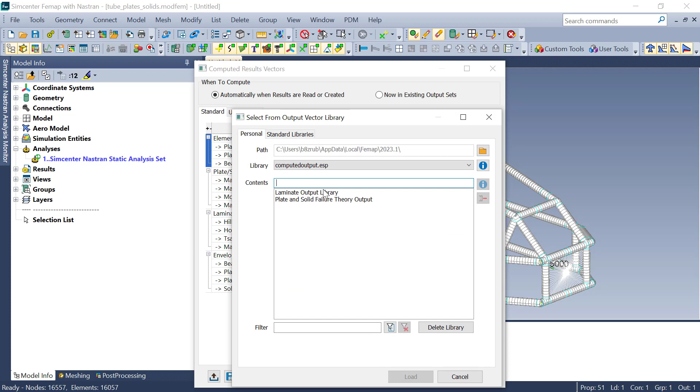The automatic side will be saved at a per model basis, meaning it will persist if the model is saved and closed. Computed vector libraries can also be saved and set for startup, so when a new model is created, these vectors will already be selected.

These computed vectors include beam bar von Mises stress, plate and solid failure theory, which calculate a factor of safety and margin of safety based off of things like max von Mises or max shear, also known as Tresca, laminate failure theories, including Hill, Hoffman, Tsai-Wu, and max strain, and also a select number of enveloping options to help identify worst-case output data.

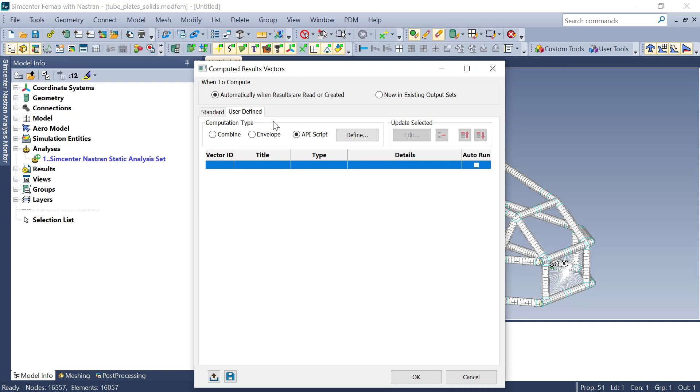On top of this, specific user-defined vectors can be set to follow the same rules as what was previously just mentioned. So let's work through one of these. I'm going to select von Mises stress for beam and bars. I'm also going to select two of the plate solid failure theories, both von Mises and Tresca. And then I'm going to run my analysis.

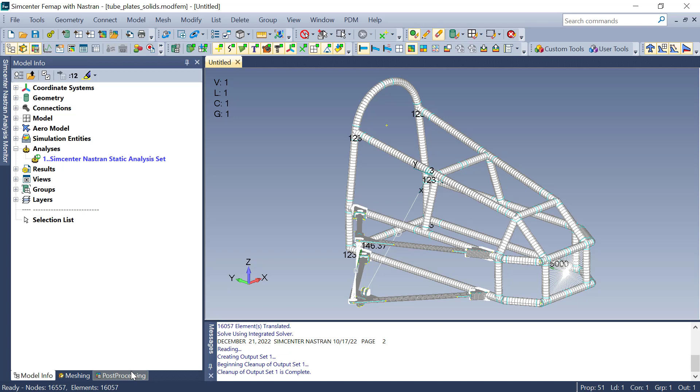The analysis has solved. And now I will see in my output vectors, I can show these newly created computed vectors, like the beam bar max von Mises stress, and also the factor and margin of safeties for plate and solid.

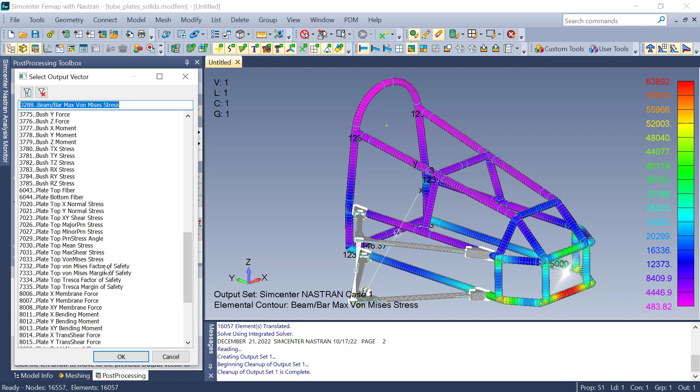Now let's say I wanted to recalculate my factor and margin of safety based on yield stress. I can come into the materials, reset those limits,

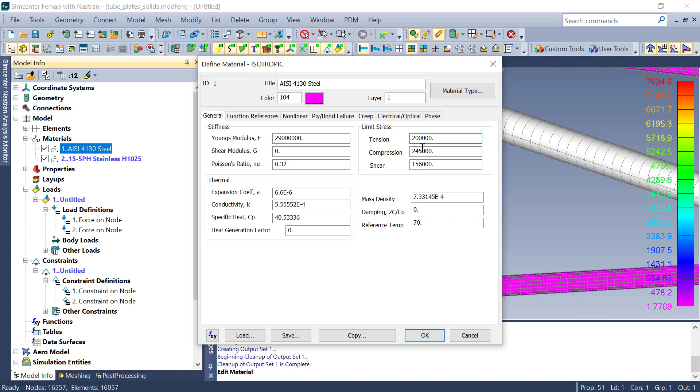go back into computed vectors, switch to now in existing output set, and recalculate those factors and margin of safety. So as you can see from doing that, my worst factor of safety has dropped slightly.